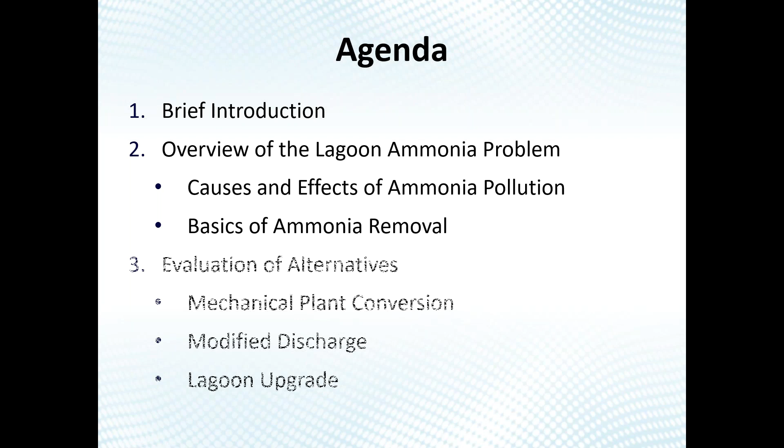We're going to talk about cost-effectively meeting new lagoon ammonia effluent limits for lagoon systems. This presentation is broken up into three parts. I'll talk briefly about Triple Point, what we do, for those who may not be as familiar with us. Then I'll give an overview of the lagoon ammonia problem, some of the causes and effects of ammonia pollution, basics of ammonia removal, and the different alternatives we see out there that people use to meet ammonia limits, trying to get a sense of comparing costs between those options.

Firstly, Triple Point — we have a motto, a belief: lagoons do it better. We know this is not the conventional engineering wisdom, and there are a lot of currents within the engineering world that say lagoons are old technology, they can't treat nutrients, they can't get the job done. We believe otherwise, and our mission is to help lagoons do it better. We know from experience that a properly designed lagoon system with the right equipment in place can meet any nutrient limit that's out there.

We know this because it's what we do. We have systems in place meeting single-digit BOD, TSS, zero ammonia or non-detect ammonia, and we've seen systems reach very low levels, down to 0.1 phosphorus, as well as under 5 total nitrogen. So it's possible to do this with the right equipment in place.

The reason we like lagoons so much, and the reason we're on this mission to help lagoons do it better, is that they're the most cost-effective and easy to operate systems there are in the world. It's the easiest wastewater treatment system to operate. For the communities and industries that lagoons serve, it really is the best solution from a cost point of view, assuming you have the space and can upgrade the existing facility, which in pretty much all cases you can.

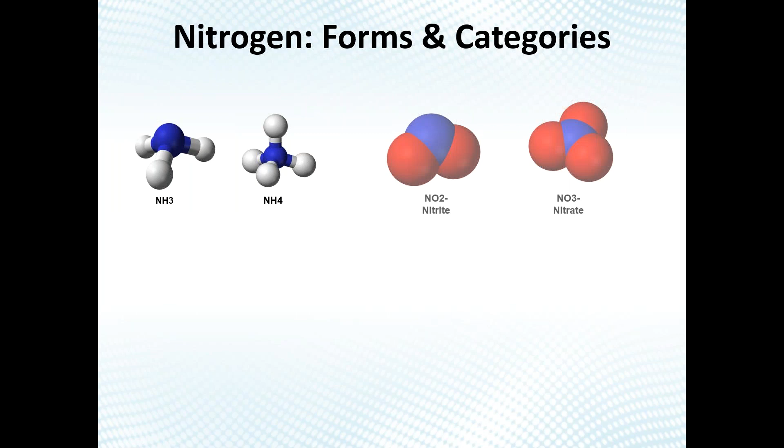That's what tends to be the harmful aspect of ammonia, and that's what tends to be regulated on your permit. So when you're looking at different forms of nitrogen, ammonia nitrogen is a combination of NH3 and NH4. So that's ammonia, NH3, and ammonium, NH4. Other forms of nitrogen are nitrite and nitrate, and then organic nitrogen. All these together make up total nitrogen. So when they're referring to TN, or total nitrogen, that's what you got to get rid of all these things basically in order to hit a total nitrogen limit. Now the other category you typically see is TKN, which is total Kjeldahl nitrogen, and that's the combination between ammonia nitrogen and organic nitrogen.

And then the other category you typically see is TIN, or total inorganic nitrogen, which, as the name suggests, is total nitrogen minus the organic component of nitrogen.

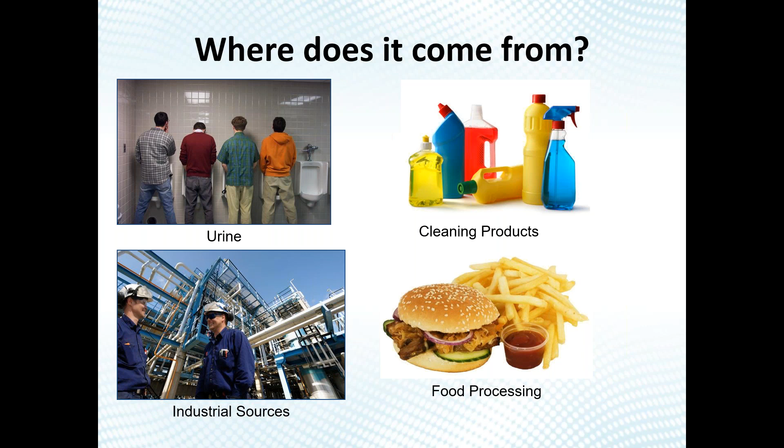Typically, in a municipal setting, ammonia mainly is going to come from our urine, basically, and that's the big component of where the ammonia comes from. But if you have industrial sources, there can be lots of industrial contribution. Food processing has a lot of ammonia in it. Any anaerobic digestion process will produce a lot of ammonia typically as a result of it. Landfills have a lot of ammonia, for example, in their leachate, because a landfill is in effect an anaerobic digester — a very, very, very slow anaerobic digester. And so the leachate tends to have a lot of ammonia in it. Ammonia is used in cleaning products too; window cleaner typically has a lot of ammonia in it. All these different sources can combine, and we often run into a lot of industrial applications where there's 1,000 or 2,000 milligrams per liter of ammonia, and a lot of municipal applications where there's 30 milligrams per liter of ammonia.

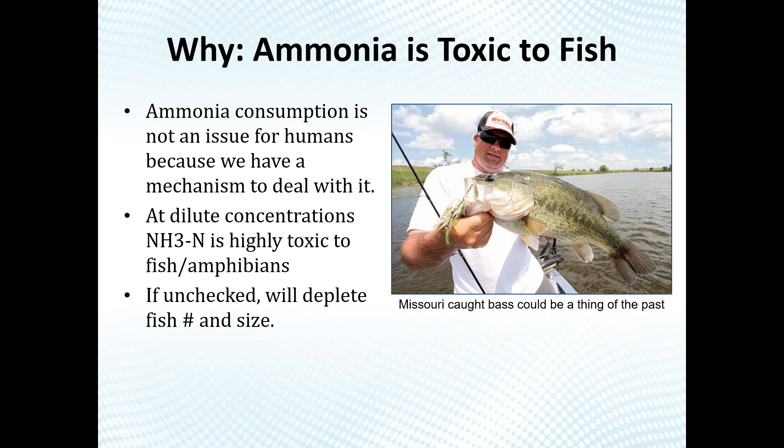So the reason ammonia is such a concern and why it's regulated is that it's very toxic to amphibious life. It's really like a bullet to the head for a lot of amphibious species like fish, snails, and the sort of basis of a lot of the ecosystems that it finds itself in. So what they found with these studies is that it can deplete populations, and it can affect the size of fish. And on a greater scale, ammonia ultimately finds its way into our waterways just like all the nutrients do.

If you're in this Midwest catch basin, the Mississippi watershed basically encompasses most of the Midwest, so all that water feeds right down into the Gulf of Mexico. Lagoons specifically make up about one third of all wastewater treatment facilities in the country, so that's approximately 6,000 lagoons nationwide. It can be a big contributor into that one watershed, but certainly other watersheds as well.

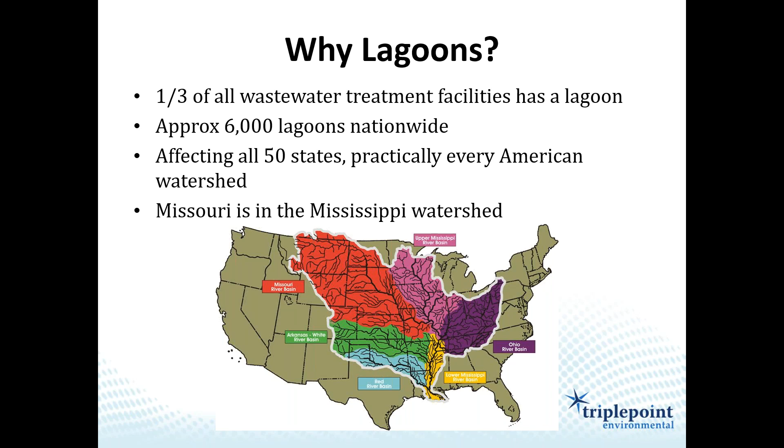That's why it's such a focus for concern, mainly because of how much ammonia can find its way into the water and ultimately into the Gulf of Mexico. If you run the numbers, we have 3,000 lagoons within the Mississippi watershed, and the average flow of those lagoons is 300,000 gallons a day. The average ammonia concentration is 40 milligrams per liter, which is maybe a little bit high.

If you do those numbers, that's a discharge of 300,000 pounds of ammonia per day into our watershed. So obviously that's going to cause a lot of destruction.

That's one of the reasons lagoons are being singled out, just like any plant is being singled out, as a contributor to ammonia.

Ultimately it finds its way down into the Gulf of Mexico, and as you may or may not know, there's an area called the Dead Zone right off the coast, where very little aquatic life can live. Part of that is the ammonia input, part of that is nitrates and other fertilizers running off farm fields and things like that. It's a huge environmental disaster - this is kind of what it is.

Anything we can do to treat the ammonia upstream is really going to help the ultimate greater environment. That's why a lot of regulators at the EPA are really trying to clamp down on ammonia discharge.

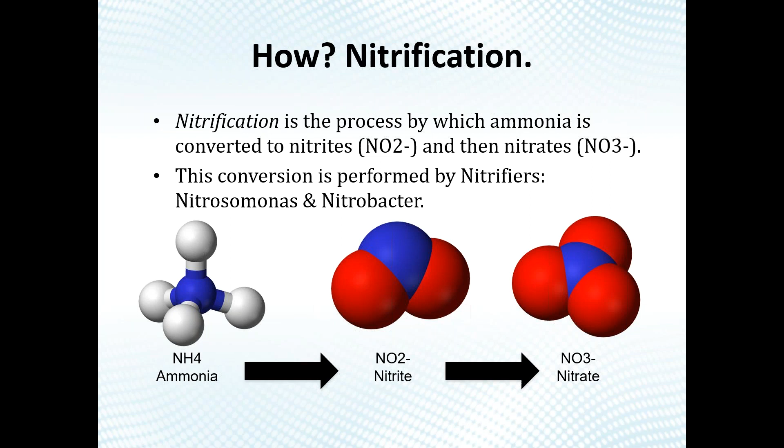In order to do that, you've really got to understand the type of bug, to use kind of a shorthand, that you need to foster. Then you've got to create the conditions for that bug to grow and thrive and do its job. So in any wastewater plant, you've really got two different types of bacteria.

You've got your heterotrophic BOD-consuming bacteria on one hand, and your autotrophic nitrifiers on the other. The BOD heterotrophic consuming bacteria do most of the work - if you consider a typical municipal system might have 150 to 200 milligrams per liter of BOD coming in, they're consuming that. They're also way less sensitive to temperature and different conditions within the lagoon itself. They're the steady eddy, reliable, very adaptable to any different type of condition, and generally get the job done - and have been getting the job done within a lagoon system for literally thousands of years.

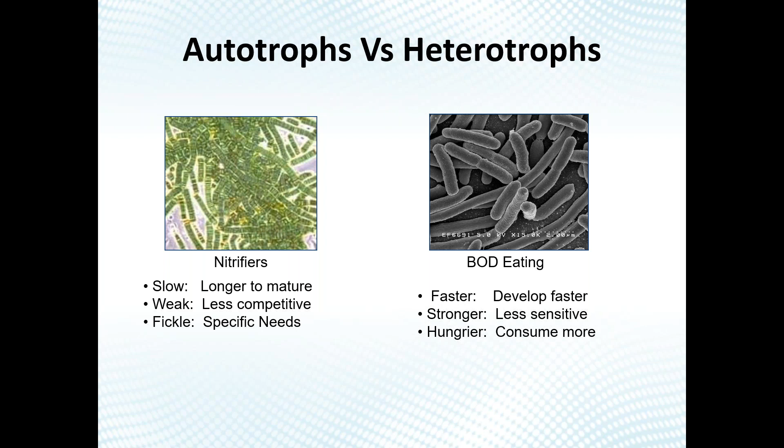On the other side, the nitrifiers, in contrast, are much more difficult to foster. They take longer to mature, they're less competitive for the food, and they have very specific needs in order to grow. That's the real big challenge in nitrification - how do you get these nitrifiers to grow? We've identified 6 different conditions, 6 key things you've got to do within a lagoon to get these nitrifiers to grow. So the first one is to reduce BOD.

The heterotrophic BOD consuming bacteria are kind of like the bullies in the schoolyard, right? They're going to eat first. They're going to go and get that pizza that's sitting on the table and push the autotrophic nitrifiers out of the way on the way there, and stomp on their heads while they're at it.

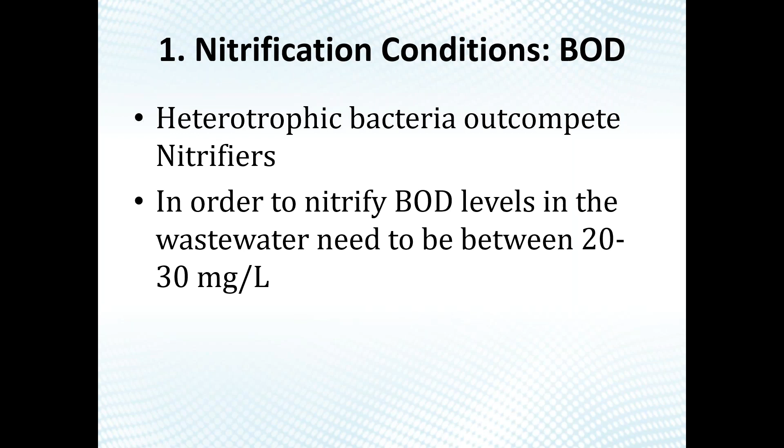And so you've got to get the levels of BOD down to 20 or 30 milligrams per liter, typical is kind of the range before you really get fast nitrification, and you can really create what we call select for the nitrifiers in the reactor.

The second thing about the nitrifiers is that they need a lot of oxygen. So if you look at BOD consuming bacteria, the heterotrophs, we design a lot of aeration systems. We do a lot of retrofits with our Mars system, for example. Typically our basis of design is we're going to find out how many pounds of BOD are coming into the system, and then we're going to add 1.5 to 2 pounds of oxygen per pound of BOD coming in. So this is very standard basis design for any type of aeration system.

And then on top of that, we're going to say we want buffer, we want a little extra oxygen in the water. We want dissolved oxygen, and that's typically anywhere between 0.5 and 3 milligrams per liter of dissolved oxygen. This is just extra oxygen you need to make sure you're never going to run out, basically, and you don't get a septic condition.

Now, when it comes to designing for nitrification, you need to have 4.6 pounds of oxygen per pound of ammonia, so significantly more oxygen per pound than you need for BOD removal. And then you need to run those DOs, especially at colder temperatures, at 4 to 8 milligrams per liter. Sometimes in the summer, you can lower that down to 3 milligrams per liter, and the nitrifiers will be just happy as clams. But in the winter, we found in order to really promote the cold weather nitrification, for reasons I'll explain in a minute, you want to really run at that higher DO.

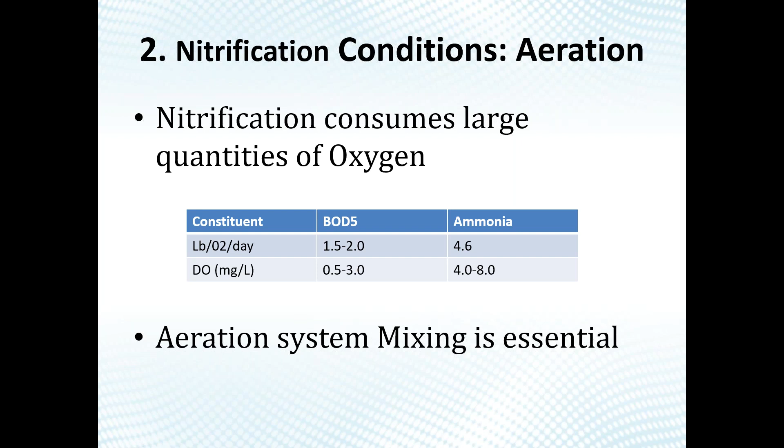The third thing that's really important is alkalinity. Alkalinity is what the nitrifiers consume when they're converting that ammonia first into nitrite, then into nitrate. Typically, we run into issues with alkalinity a lot in industrial applications where there's no background alkalinity within the water, or there is background alkalinity within the water, however, there's not enough to nitrify enough, right?

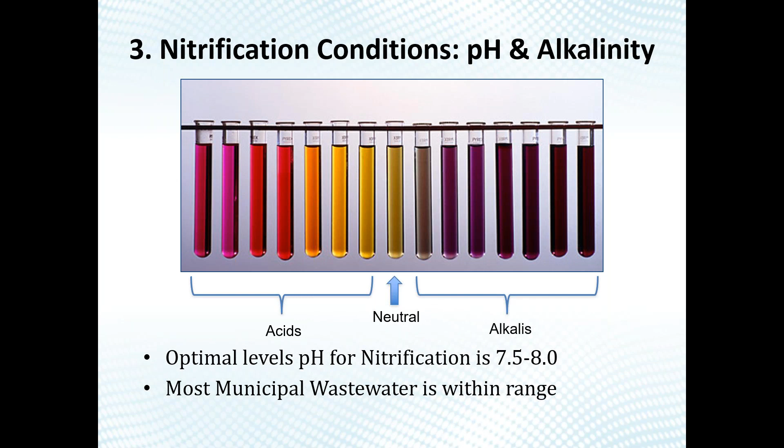Now, municipally, this is generally not a concern. There's plenty of alkalinity within the water to get the nitrification done without having to add any. Industrially, this is of high concern because in a lot of cases, the feed water coming in just doesn't have that background alkalinity. So it's a big thing to make sure you maintain that pH that's optimum for the nitrifiers and have sufficient alkalinity for them to do their job.

The fourth thing, and this is super, super critical, and this kind of dovetails into the fifth thing, is, in order to nitrify, you have to grow nitrifiers, right? You have to have what's called a biomass, a sufficient nitrifier mass in order to do the job.

Now, nitrifiers are what's known as an attached growth organism. So they like to grow on things, and so in a lagoon, they're looking to grow on any surface they can find. They'll grow on the sidewalls of the lagoon. They'll grow on the aerators in the lagoon. They'll grow on the baffle curtains that are in the lagoon, anything they can attach to.

What you often find is that the more surface area you can provide to the nitrifiers, the more nitrification you can achieve in a smaller time frame, right? So you've got to give the nitrifiers a home to live in. And the more homes you give them, the more surface area, the more nitrifiers you grow, the better nitrification you're going to see, and the faster you're going to see it at low temperatures.

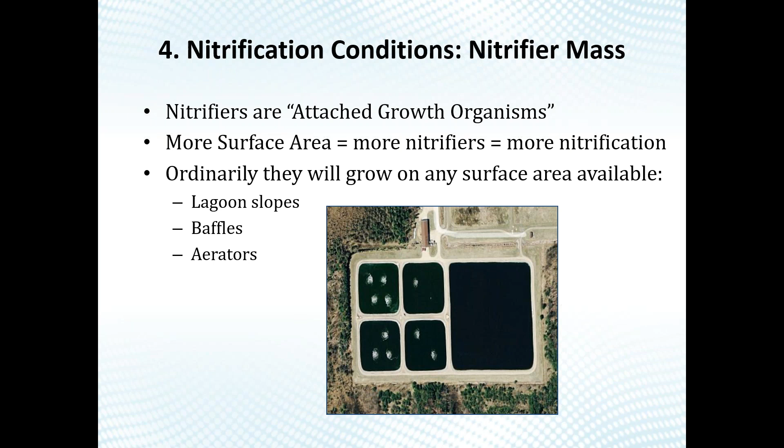So we find a lot of lagoons can nitrify in the summertime, and they get really great ammonia results. They'll get down under 1 in some cases in the summertime. It just comes out and there you go. The ammonia is under 1, it's awesome. But you get into winter and all of a sudden it just pops up.

This is a system in Iowa that we're actually doing the upgrade on right now. They have plenty of data from their influent and effluent ammonia, and it's very typical of what you see. Summertime, great, killing it, getting that ammonia down. Maybe not quite meeting their permit limit, but pretty darn close when the water temperature's high enough. Then the water temperature drops in the winter, and all of a sudden nitrification drops off significantly, and they lose - they're up there at 10, 15, 20 milligrams per liter ammonia, and that's not going to hit their permit.

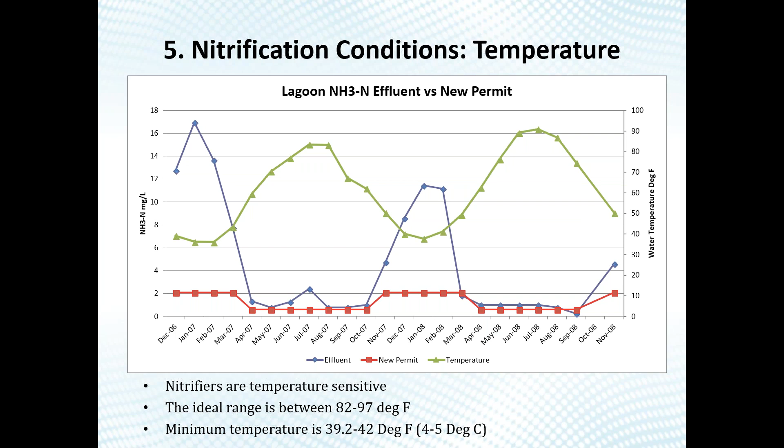And so this is where lagoons tend to struggle, and the reason is that nitrifiers are very sensitive to temperature. Lagoons can treat the BOD. Municipal lagoons typically don't have any pH or alkalinity issues. You don't see a lot of toxins in lagoons, like oversupply of heavy metals that will affect nitrifiers. I didn't talk too much about that, but that would be a whole presentation in and of itself. Nonetheless, that's something you need to pay attention to industrially, but municipally, not too much of an issue.

However, where lagoons fail is that they fail to have sufficient nitrifier mass, and they can't do it within the temperature due to the fact that they don't have sufficient nitrifier mass. They generally don't have enough oxygen and enough mixing designed into the system. So that's where lagoons tend to fall down when it comes to nitrification.

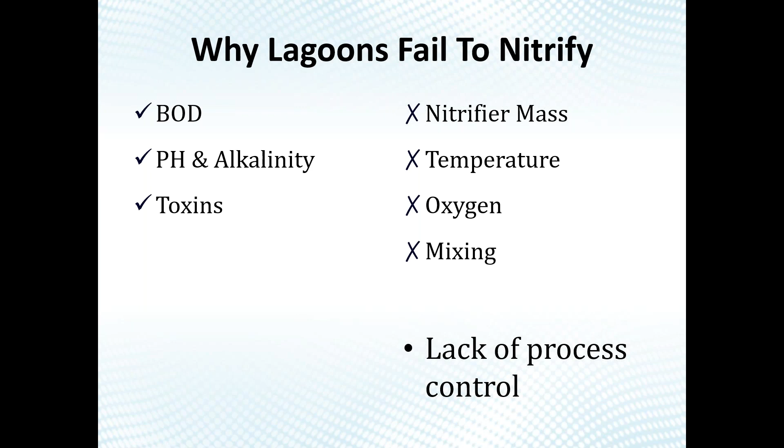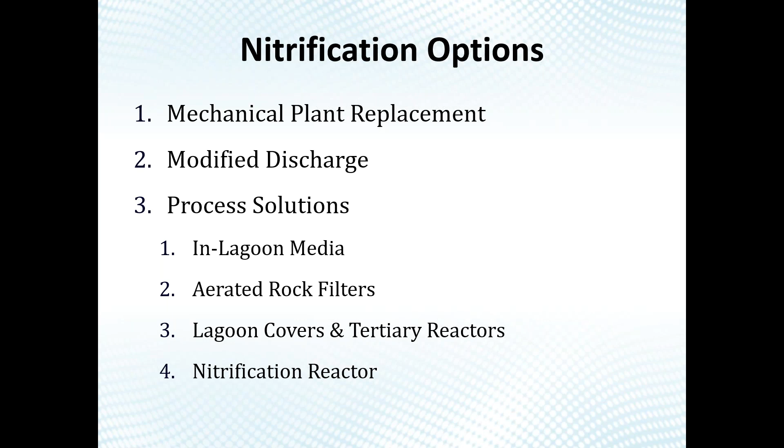So we're going to talk about some options now. What do you do if you have a lagoon and you need to meet an ammonia limit? First thing, we're going to talk about the conventional wisdom - the mechanical plant replacement. Then we're going to talk about a modified discharge. And then finally, what do you do if you upgrade your lagoon, and what does that look like? We'll talk a little bit about our nitrox reactor during that process too.

So firstly, the mechanical plant upgrade - this is being kind of the conventional wisdom probably until about 5-6 years ago, where you got a lagoon, it's not hitting its ammonia limit, it's not designed to currently, and people think, well, the lagoon can't do it, so we're just going to get rid of the lagoon. So they come in, they design this nice shiny mechanical plant, gets into place, no doubt can meet the ammonia limit. Mechanical plants have been treating ammonia for years. Small footprint, especially in terms of a lagoon - it'll fit into 1/10 the lagoon size for the same treatment flow. And then you can double, triple capacity if you want to within that footprint size.

The problems with this approach, and the state of Idaho is a good example of this, where they were sort of actively pushing lagoons out of existence. They didn't want to permit lagoon upgrades, and so they went in, they put in some mechanical plants, forced some communities to put in some mechanical plants, and then we get 5 years into this, and they're sitting there and they're looking at the data, what's coming out.

They're looking at the lagoons, they're still online, and they're looking at the mechanical plants. And lo and behold, the lagoons are putting out way better effluent than the mechanical plants are. And they're like, well, what's going on here? Why are the lagoons doing a better job?

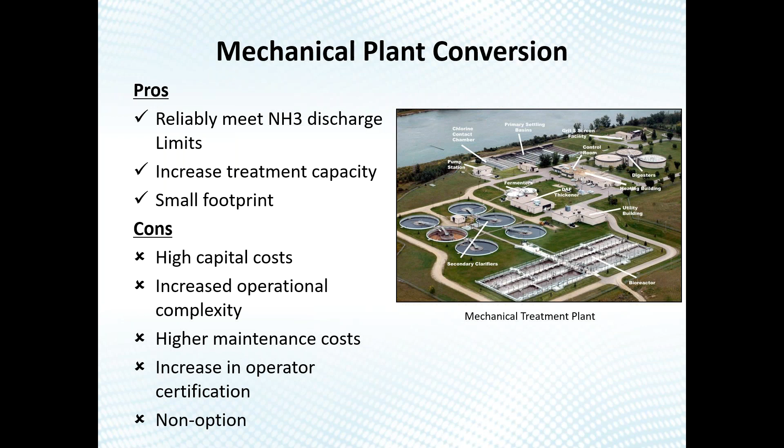The second thing that we run into a lot is land application. A lot of states really try to push land app, and there certainly are some environmental benefits to land application done properly. The nutrients themselves end up getting taken up by a growing crop that is on the ground, and that nutrient-laden water doesn't theoretically find its way into the receiving stream. And then beyond that, the rest of the water is able to trickle down through Mother Nature's filter and potentially recharge the aquifer as well. So it makes a lot of sense.

And I'm not totally anti-land app by any means, but I had some experience with this. I used to work for a company previously to Triple Point that designed and operated land application systems. And it does require a lot of land to build the storage lagoons necessary, because in most cases you can't irrigate 365 days a year.

And then it also requires a lot of irrigation land, which generally you can't irrigate on a food crop with wastewater effluent. So you're looking at a non-food crop. In some areas, there just aren't any non-food crops available. Cotton would be a good one, except in a lot of cases, cotton fields are just not available. And so it can be very expensive to acquire that land and take up a lot of area. A lot of folks just end up growing hay, and then they give the hay away in return for somebody coming out there and just mowing it once a year and baling it.

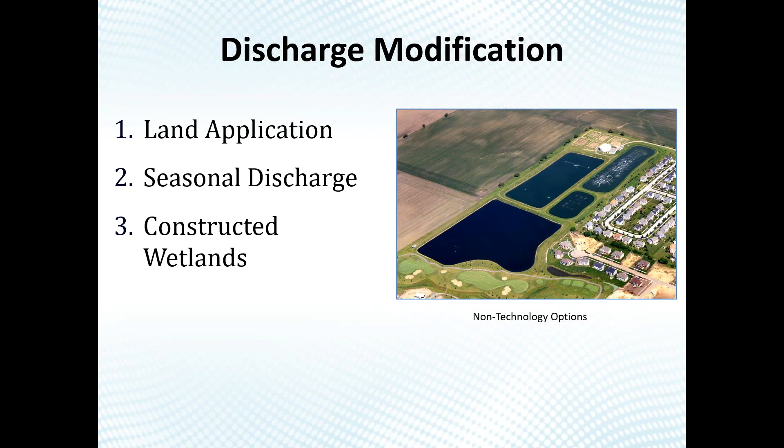So there's really three different options I'm going to investigate here, and this ties into creating the conditions you need in order to nitrify within the lagoon system. All these options, in one form or another, are looking for ways to add surface area to give the nitrifiers a home, and everybody does it in a different way. The second thing folks look to do, in some cases, is to control temperature or mitigate the effects of temperature. Those are the two key factors: surface area and temperature, biomass and temperature.

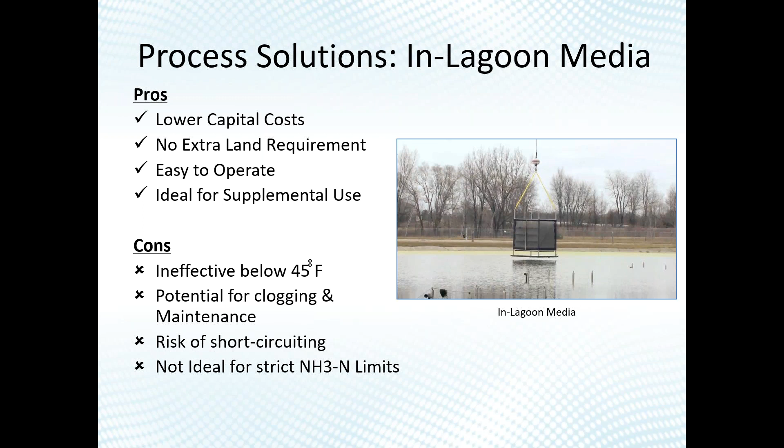So another option to upgrade a lagoon is to do kind of similar to what I showed you on the NitrOx. You treat the BOD through the preceding lagoons, right, just like you normally would. And then right at the back of the process, right before you discharge, you add what's called an aerated rock filter. This is a hole in the ground, basically, that you put an aeration grid on the bottom of, and then you fill it full of rocks.

These things can be really big. They're designed with the principle of putting enough surface area out there in terms of rock that the bugs can grow on, that you've got so much surface area that you can overcome the really slow treatment you get in winter when it's cold outside, because you've got so many nitrifiers out there that even if they're eating slower, they're still eating and consuming the ammonia.

And so these systems are tried and tested. They've got these things operating in Manitoba, Canada. I was just there last week. It was summertime, so it was warm outside, but I've been to Manitoba during the winter, and it is the coldest place on earth that I've ever been to. I haven't been to Antarctica, but it was brutal - minus 20 degrees Fahrenheit at the end of November last time I was there. That is ridiculous.

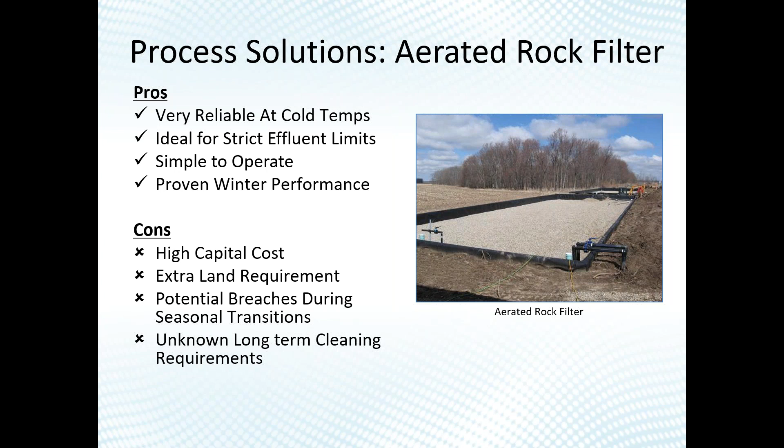So the problem, of course, is that you have an aerated rock filter, but it's a filter that can't backwash itself. And if you don't have a backwash mechanism for any filter, there's always the potential to clog. So that is a big long-run concern.

The second option in this vein, or third option before I get onto the NitrOx, takes a slightly different approach. What it does is it says, hey, why are we losing all this heat in the lagoons? Well, it's because we've got this big surface area. What if we covered and insulated that surface area? What if we put a floating insulated cover on the surface? At first it kind of sounds crazy - these lagoons are huge, you can't put a cover on these things.

But when you do this - and this company sold a lot of these systems - you aerate underneath the lagoon, you keep the temperature in, and you can get that nitrification. So that's exactly what happens. They have a lagoon system, typically a 3-cell lagoon system, 2 aerated cells and 1 polishing cell. It's all covered. And then they'll also have a tertiary attached growth reactor right at the end of the process, just for polishing - what they call a polishing reactor.

That can grow some nitrifiers and do whatever nitrification can be done, but they don't ever allow the temperature to fall far enough where they lose that nitrification, even in the winter months. So again, been around for a long time, really good treatment, can't touch the numbers, great numbers.

The issues that I've seen with it is, again, capital cost. When you're covering a huge lagoon, that's going to cost a lot of money, and that's just square footage. It's a simple numbers game to figure out. You're going to pay $3 to $4 a square foot for just the cover alone, and then you got to buy the equipment and all the above.

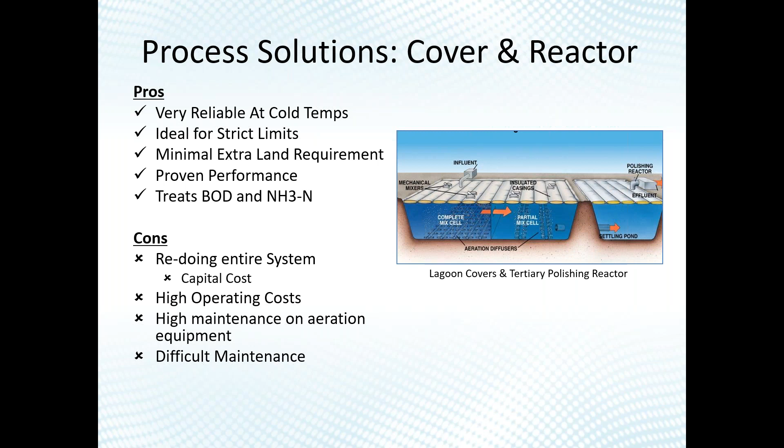It's almost like buying 50% of the system from an equipment point of view that you bought 10 or 15 years ago when you originally bought it. So it's a big concern in terms of cost. We've seen that be quite high - I'll go through the numbers here in a minute - but it's probably one of the highest cost options when you pen out all the numbers.

So we looked at all these different options when we were looking to come up with a NitrOx system, and we were thinking to ourselves, man, nitrification is expensive. It just seemed to us like you could treat 1,000 milligrams per liter of BOD using aeration for a fraction of the cost of putting in a nitrification system - a quarter of the cost of putting in a nitrification system for 30 milligrams per liter. So we're just like, man, there's got to be a better way to do this.

So we looked around and we thought, well, we like the idea of using the existing lagoon infrastructure, trying to leverage what's there. And so that's exactly what we do. We've got Lagoon Cell 1, Lagoon Cell 2, then through the NitrOx. So we rely on the lagoons to do what they do best, which is to treat the BOD, right? And they can be aerated or facultative - we don't really discriminate between the two, so it could be either.

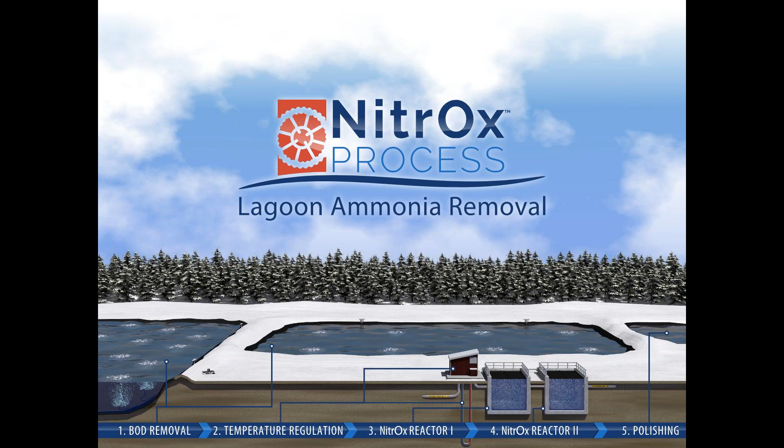You just got to get the BOD down to 30 or 40 milligrams per liter. Then we pull it through our 2-stage nitrification reactor, and then into a polishing cell - which is existing, or we create one - or we can use tertiary filtration equipment if necessary, and then out the system. The first thing you can see here is it's a very, very small footprint relative to the lagoon size. I've yet to find a site, even really tight sites, where we can't fit these reactors on - they will fit in a very small footprint. So that's a really, really big cost saver in a lot of these applications.

So how do we do this? Well, we do it by fostering the growth of nitrifiers. Like I said, it's all about providing surface area. The way we do it is we add these little media pieces - this is what's known as a moving bed biofilm reactor system. This technology has been around since, I think, the 80s when it was originally invented, and it's been used for 30 years to nitrify. So we're using this MBBR principle of using these little media pieces in order to create surface area for the nitrifiers to grow on. And the beauty of these media pieces is you can fit a lot of surface area in a really small footprint, right?

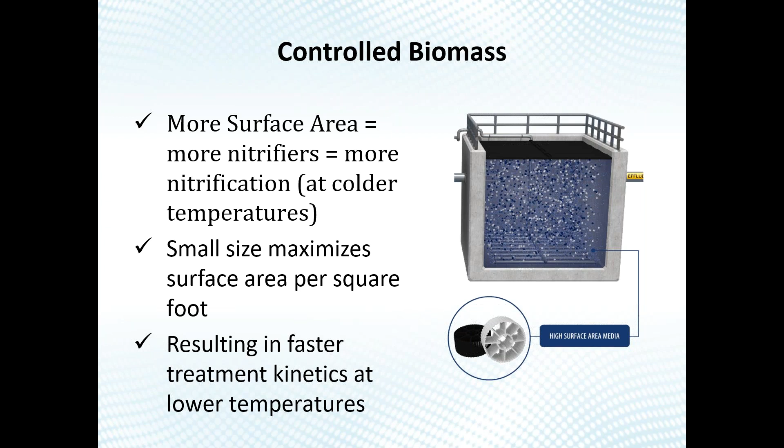So if you looked at that lagoon I showed you earlier, you need a biomass to grow, and in an existing lagoon, the nitrifiers will grow on the surface area of the floor, the walls, the baffle curtain, or the aerators—whatever they can get themselves onto. That's 167,000 square feet of surface area for them to grow on.

How much media is that, of this type? You could fit that 167,000 square feet of media within 1/3 of a semi-truck. So you're fitting a significant amount of surface area in a really small footprint. That's the beauty of the media—it allows you to grow as much biomass as possible, which allows you to get that really, really cold nitrification.

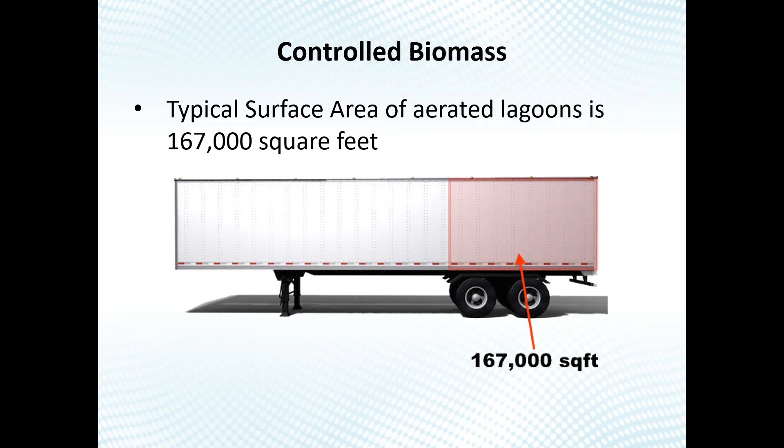The second key thing is that we have an aeration system creating a completely, highly mixed condition. This is a medium bubble aeration grid, which sounds fancy, but really it's just a stainless steel pipe with holes in it—really tough, very low maintenance. That grid creates all the oxygen transfer and mixing you need to get rapid nitrification.

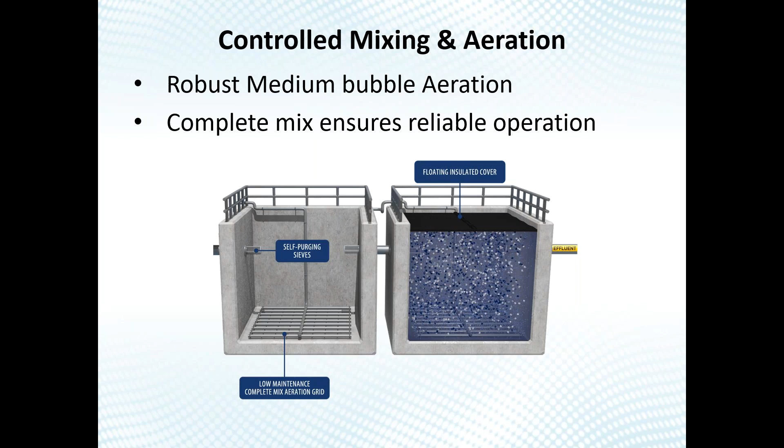It also ensures that no solids are going to settle within this reactor, so you don't want any sludge building up in here, and it won't. It just creates a bubbling cauldron within the reactor that prevents any solids from settling.

The third aspect of the system is that we will actually regulate temperature in the wintertime, depending on where you're located in the country. If you're down south and your lowest possible winter temp you've ever seen is 5 degrees C, then we don't do any heating at all. But if you're in the mid or north part of the country, we'll look at the seasonal temperature variations and regulate the temperature of the water at 4 degrees C.

This is what's different about the Nitrox system relative to a simple conventional MBBR system. From literature and hundreds of field studies, we know you can't nitrify below 4 degrees C reliably within a moving bed biofilm reactor. So if we can keep the temperature at 5 or 4 degrees C, we can guarantee nitrification—and that's exactly what we do.

We typically use 3 different approaches, depending on the site and different design considerations. One is to actually heat the water using an electric tank heater. This is a very simple device—you run a current through it, it heats up a heating element, and heats up the water. Couldn't be any simpler.

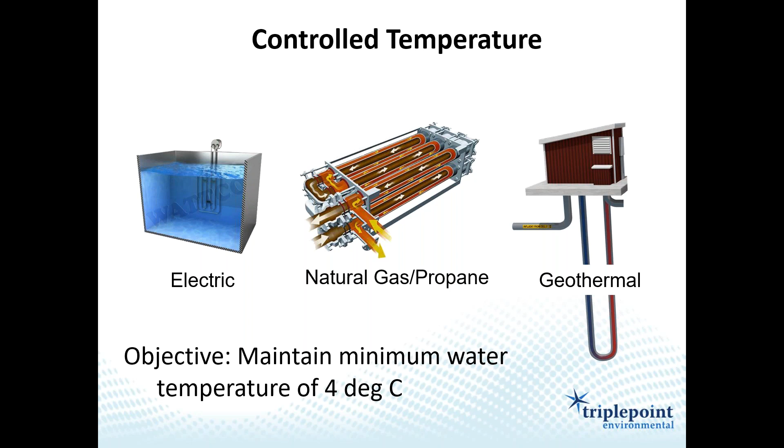The third option is geothermal. So you're probably thinking, what's this going to cost me? It sounds like you've got a lot of water—it's going to cost a lot of money to heat up. To some extent that's true, but it's not as much as you think, and it's very easy to calculate what the cost is.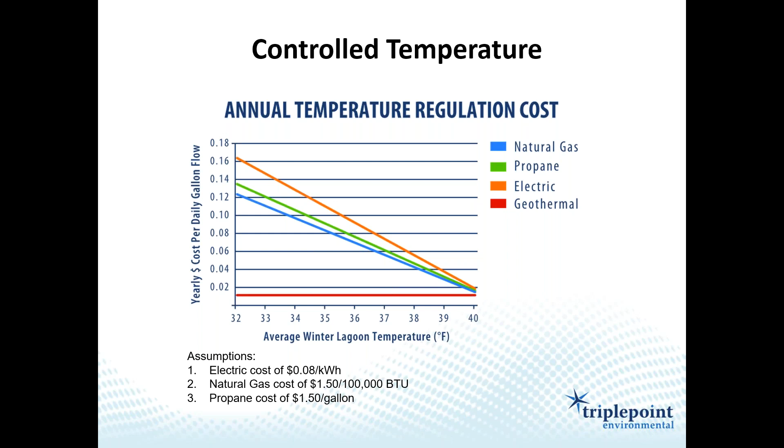And in fact, we've consulted with the owners of these two facilities over the last 2 years.

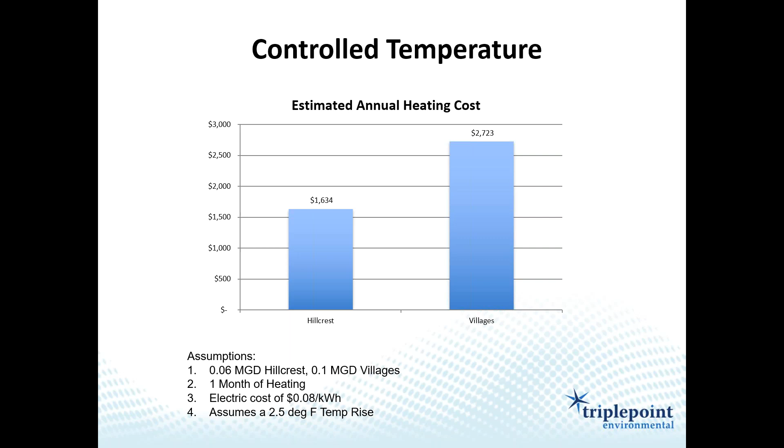They've been using the system, and they basically said we haven't really seen any cost difference in our bill in the wintertime, so really the heaters weren't even being utilized in a lot of cases. That's one of the nice things about the nitrox system: whereas with the cover system or the aerated rock filter system, you're paying for cold temperature upfront, the coldest winter possible condition on day one. With the nitrox system, you're only paying for that coldest winter condition when you actually see it, and it can fluctuate year to year. So this provides a more cost-effective approach over the long run.

Similar to other systems, the operational requirements are really minimal with the nitrox system. That's one of the beauties of it. It's very passive. You've got an aeration blower that you have to maintain, which is pretty much the same for everybody. Everybody's got to put a blower in if you're doing nitrification, whether a mechanical plant or a lagoon upgrade. So you've got belts, filters, oil changes. But beyond that, the heater runs when it needs to run. It's on auto, like a thermostat - turns on when the temperature dips below, turns off. You don't have to touch it.

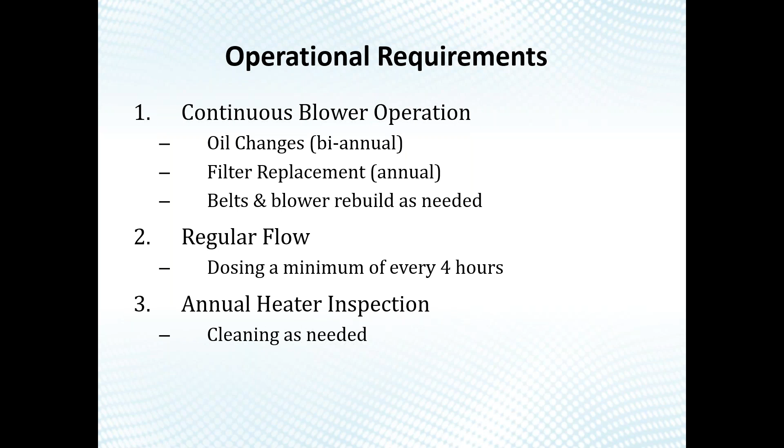You just have to keep flow going through the reactor at all times. The bugs need food to eat, so if you starve them and don't give them any food, they die, and you're starting from square one. But for most operators, this is very, very simple. They're checking on it once a day, maybe even once a week in some cases, just making sure that blower runs.

So the beauty of the nitrox system is that it's small footprint, low capital cost - that's really what it comes down to. It's also a really passive operating system. Those are the three main advantages.

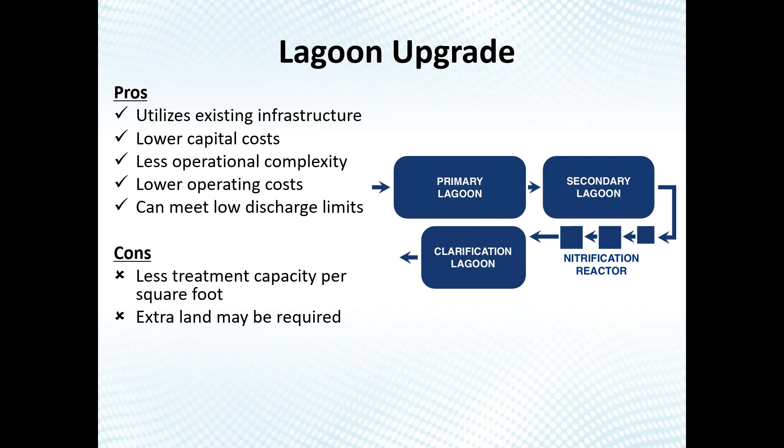So now that we've looked at all these options, I wanted to give a case study, some order of magnitude cost, so you get a sense of how these things typically stack up. Now I'm going to caveat this with: it depends. Obviously it depends on the application, it depends on your situation, and this is not going to be true of every plant, these numbers. I've taken these numbers from engineers I've worked with in the past who've done facility plans that they send into the state, basically putting down the cost to each different approach. So again, just take it for what it is - not a design, just a generalization, and not to be taken to the bank, literally or figuratively.

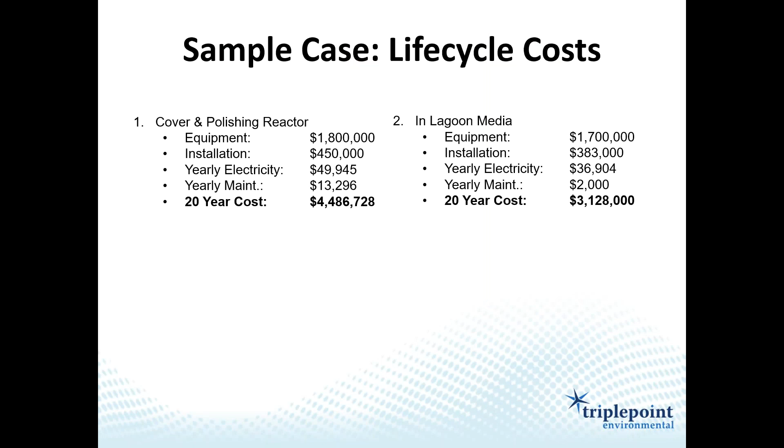So we looked at the polishing reactor with the cover system - that was most expensive. The aerated rock filter was the second most expensive option, then followed by the In-Lagoon media, and then the nitrox system was significantly less expensive than most other options. This is what we typically see.

And it kind of makes sense, right? The cover tends to be the most expensive because the cover is very large - it requires a lot of cover to get out there, so there's a really high equipment cost. The installation isn't as bad from an installation cost point of view, but that equipment cost really drives things up.

The In-Lagoon media, as much as you'd think it would be lower cost than a lot of these options, it doesn't end up being because, for whatever reason, you've got to put so much media in the lagoon to actually get enough media in there to get the nitrification you need, that the equipment cost tends to be relatively high. Those media modules add up, and the shipping costs on those modules can add up significantly as well.

Finally, the aerated rock filter, which tends to have a lower equipment cost, but the installation cost is high because you've got to truck this rock in, and you've got to get a lot of that rock. Versus the nitrox system, which usually has the lowest possible installation cost of all the alternatives, or close to that between us and kind of the In-Lagoon media side, and lower overall operating costs as well.

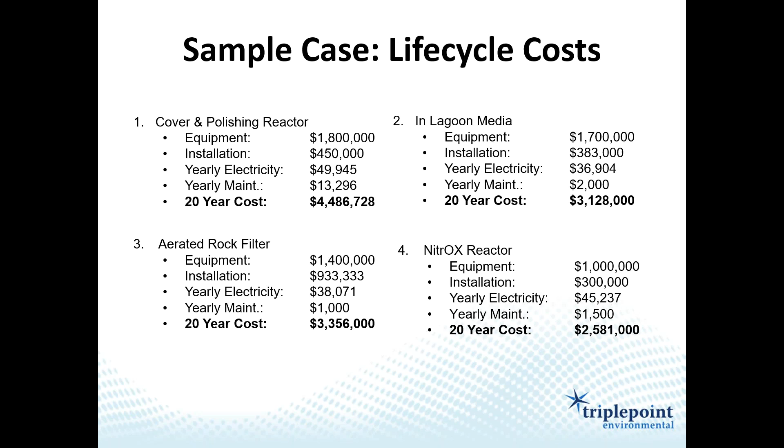So again, take it with a pinch of salt, but that's just some of the numbers we've run across in the past. I think the point I like to drive home here is that yes, you might have a little bit higher operating costs with the nitrox system if you are heating the water in the wintertime versus some of the other options. But when you model that out over a 20-year period, it doesn't catch up, because the cost of the equipment and the cost of the installation is so much less on the front end.

And that's really using kind of a worst case scenario model, where you're planning on 2 months a year at 2.5 degree temp rise for the entirety of those 2 months. So when you pen out those numbers, even in the worst case scenario, the nitrox tends to be the most cost effective option. Again, take it with a pinch of salt, but this has just been my experience.

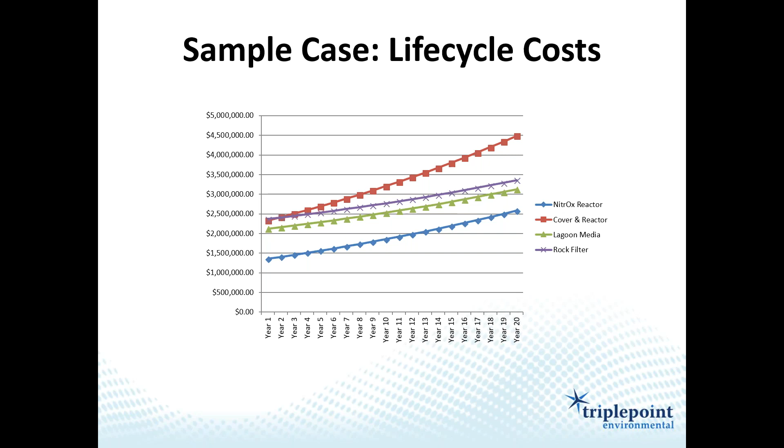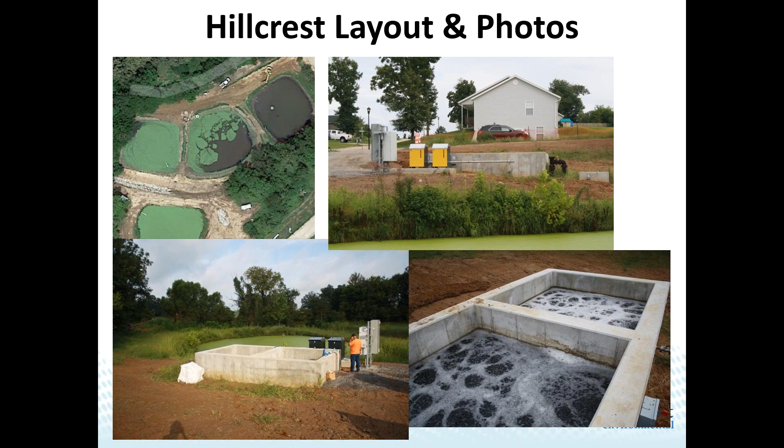So just a couple of pictures here of some of the installations we've done. This one is the Hillcrest facility that you saw earlier. As you can see, again, just a very small footprint relative to the full lagoon size. Very simple installation — you can put the blowers outside if you want to, or in a building if you'd like. Pretty straightforward stuff. We've seen very, very good effluent out of this plant since we started it up.

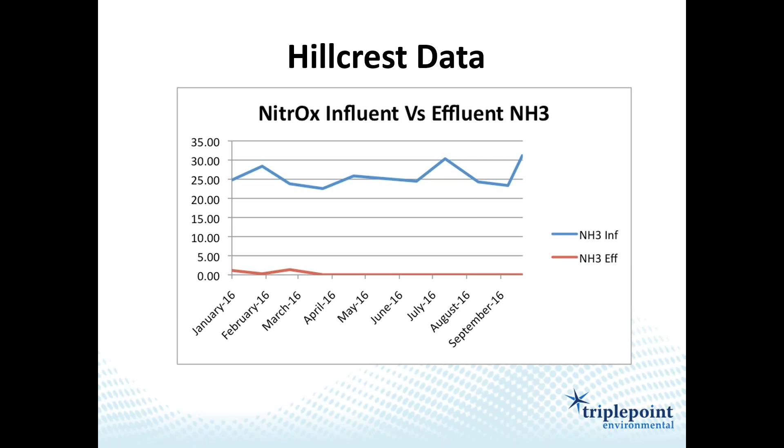This table is not quite up to date, but basically zero ammonia out of the polishing pond for 90% of the year, which is extraordinary. I'll take the Pepsi challenge with any mechanical plant on this ammonia treatment, so to speak. And then also really good BOD and TSS, averaging in single digits over this test period — did a good job of removing that as well through the total system.

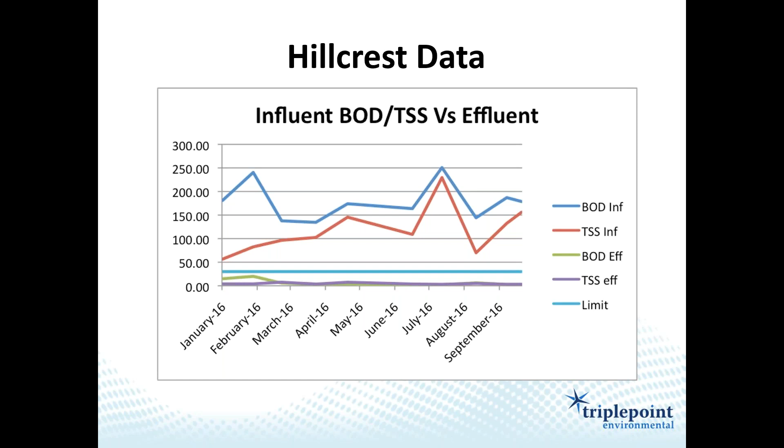You look at the water coming out of this plant and I'm amazed by it, even though I shouldn't be amazed, but I am. It really looks like clean water — it looks like a glacial lake coming out of this effluent pipe.

So with that, I will sum up, and we're getting here close to an hour. Anybody's got any questions, they can type them in the question box on your right-hand side, I believe, and I will do my best to answer them.

Okay, so I already have a bunch of questions in here. I'll try to answer them in turn. How does the effectiveness of the Triplepoint system compare to that of circulators? That's one of the questions.

So circulators — I assume you're referring to the solar powered circulation systems — they're not designed to be aerators, hence the name circulator. They do provide some passive circulation, and some aeration, because they pull water up from the bottom of the lagoon and circulate it across the surface, which allows Mother Nature to blow across the surface and add some oxygen to the water. But they're really not a nitrification solution, because they are not designed to add sufficient oxygen to achieve nitrification or sufficient mixing. So I think they're good for a supplemental use case scenario, de-stratifying the water, and they'll help enhance a facultative lagoon's operation potentially, but they're not going to do the heavy lifting necessary to achieve nitrification. And that's just, as far as I'm concerned, a fact.